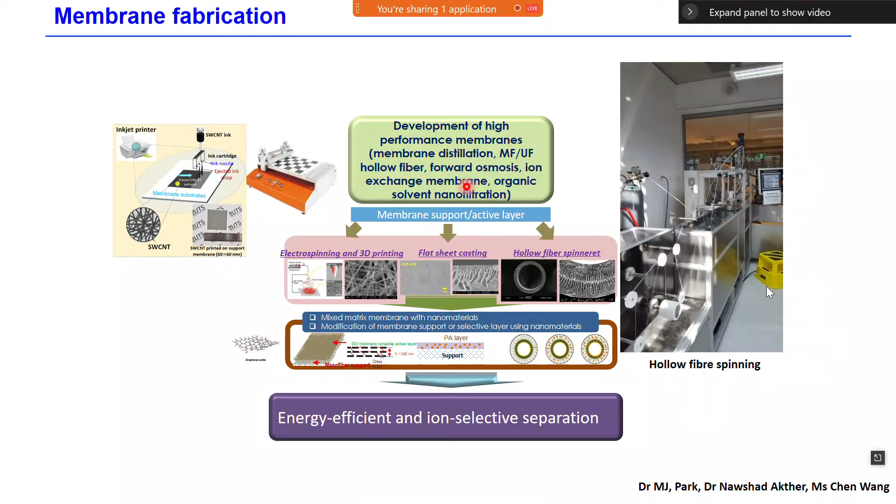So this is one of our activities. Professor Drolli also mentioned membrane importance. We have contributed our research on membrane fabrication in terms of membrane distillation, also hollow fiber, microfiltration, ultrafiltration, forward osmosis, ion exchange membranes, especially for CDI, and then organic solvent nanofiltration. So MJ Park and Nawshad and Ms. Chen Wang are working on this membrane fabrication area.

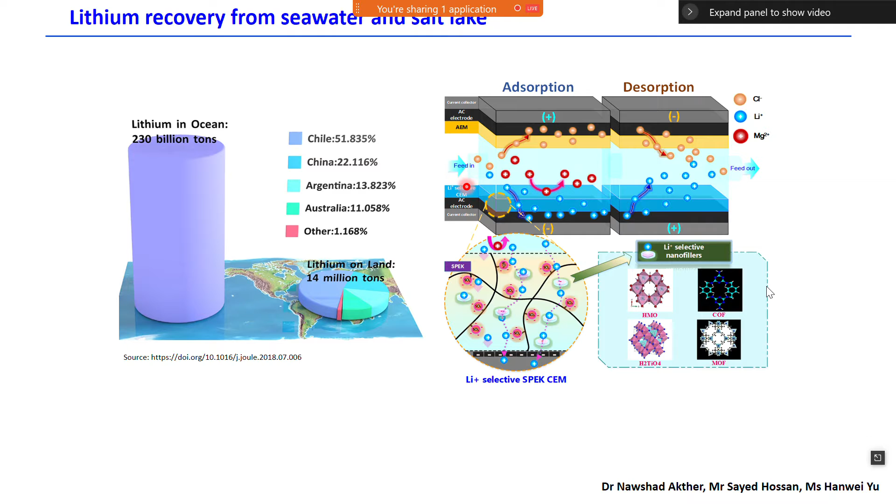Also lithium recovery from seawater and salt lakes. Professor Drolli also mentioned resource recovery for lithium in seawater. Our group is especially interested in CDI and lithium selective ion membrane development. So we have applied CDI and ion exchange membranes for the recovery of lithium. We are contributing together with Dr. Nawshad Akther and Sayed Hossan and Ms. Hanwei Yu. And this is our applied research.

So, based on our previous CDI experience, we have funding from the United Nations. There is one very small country whose capital is Funafuti. Tuvalu is very much impacted by sea level rise, so they have salt contaminated groundwater. So we have collaborated with them to look at renewable energy, solar driven CDI desalination technology, to have more applications. We are now working to apply our developed solar powered CDI technology in Tuvalu for desalination.

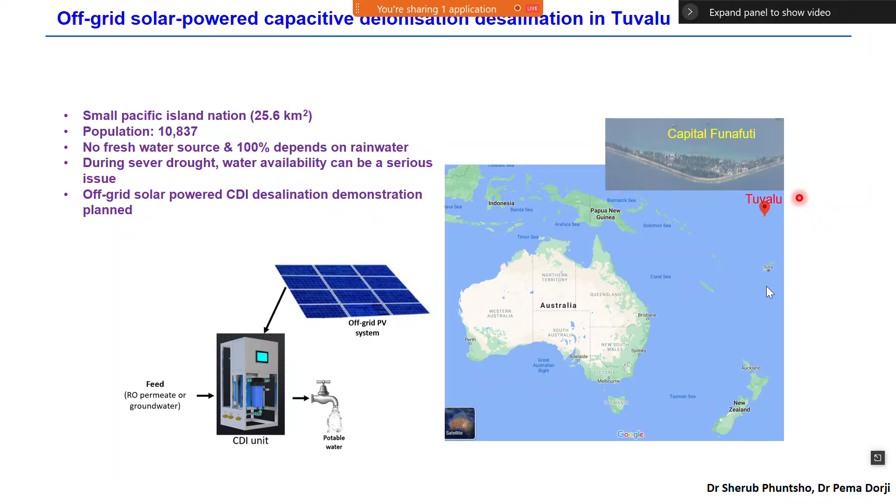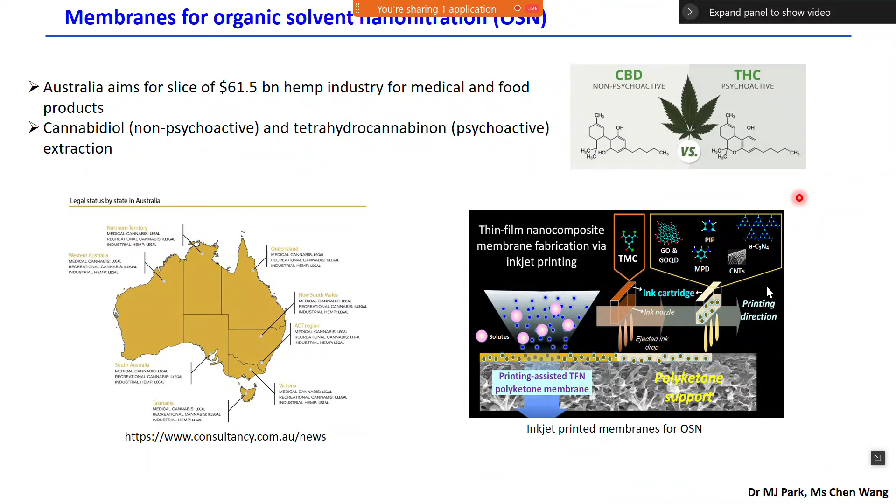Dr. Sherub Phuntsho and Pema are working on this area, and MJ Park and Ms. Chen Wang are working on organic solvent nanofiltration. In Australia, cannabis is legal. Cannabis includes CBD and THC, which have medical applications. So there is a lot of organic solvent utilization. We want to contribute to how to recover this organic solvent using organic solvent nanofiltration to separate specific compounds in the cannabis, so that we can save a lot of energy and address safety concerns, rather than a distillation process. That's our overall research activity.

And today, my main topic is about the circular economy and resource recovery.

So let me tell you what's the definition of circular economy and resource recovery. A circular economy is an economic system that tackles global challenges like climate change, biodiversity loss, and waste and pollution. Resource recovery is using waste as input material to create valuable products as new output.

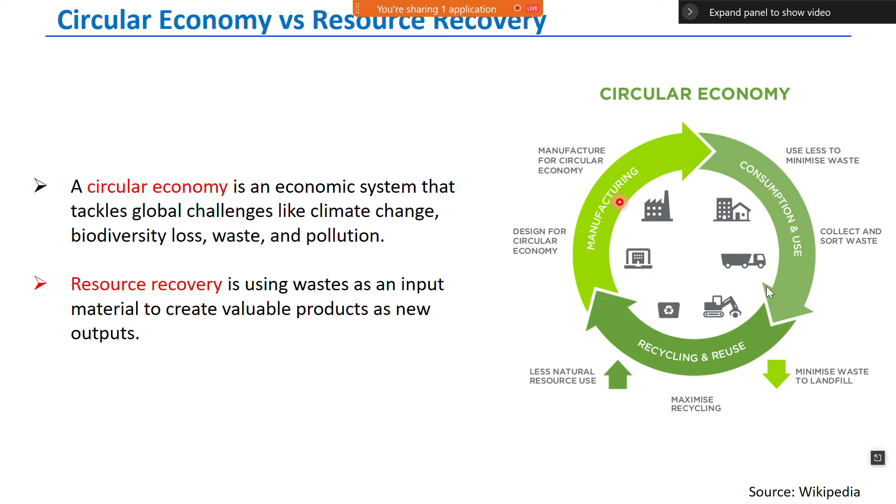So if you look at this diagram, you will have a better understanding. Resource recovery is more about how we can make less natural resource using our recovered resource, and then we design for the circular economy and manufacture for circular economy. So this is more about the manufacturing side. The resource recovery is a subset of a circular economy. The circular economy is the bigger concept of resource recovery.

So today we want to recover urine to fertilizer. That's my talk. So as soon as you get up in the morning, what are you doing first? Somebody drinks water. Most people, they have to go to the toilet. So when you urinate, what's your urine inside?

You can see a lot of nutrients. Water is very high content, and nitrogen, phosphorus, potassium, calcium, magnesium, sulfate, iron, manganese, boron, molybdenum, zinc, copper, and then some organics, also some micropollutants such as pharmaceuticals or hormones, as well as sodium chloride, some pathogens because of outside contamination.

So we produce the urine every day, almost 1.5 liters from each person. So there's a lot of concentration of nutrients. If we recover it, we can produce a lot of fertilizer as a good material without any risk problem.

So this is what we live for today. We are very much a linear economy. We produce the nitrogen from the Haber-Bosch process, nitrogen fixation. So we produce the urea or ammonia and supply it to food.

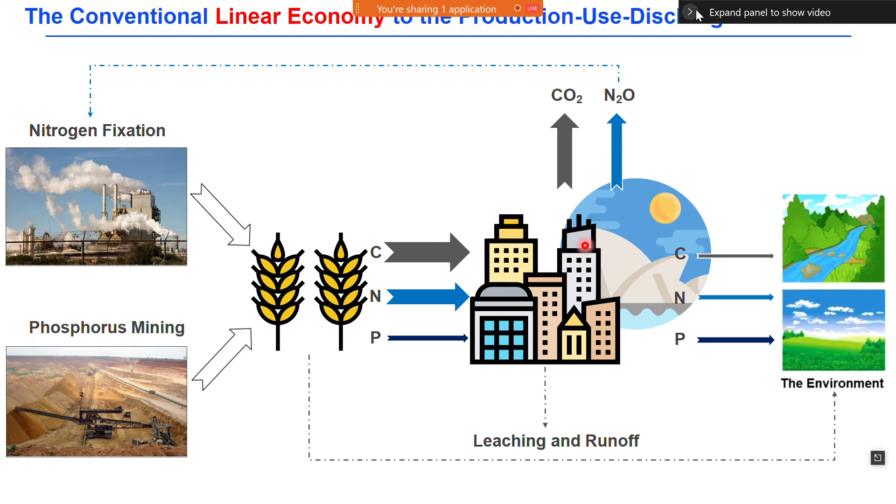So my study is about how we make this linear economy into a circular economy system. That's what our research is about. If you look at the international fertilizer market, it's around $150 billion US, and it has to keep increasing because of increasing population and industry. Also there's a global shortage of nitrogen and phosphorus fertilizer, so the price will be higher. So if we potentially convert our urine to fertilizer, we can cover a large portion of the total liquid fertilizer market that can be recovered.

So let's say now in 2021 we have 8 billion population, and everybody produces 1.5 liters per day, so we produce 12 billion liters of urine. That urine contains around 20 grams per liter of salt, which is mostly fertilizer, and we can convert it to fertilizer. So we produce every day 240,000 tons of fertilizer, especially nitrogen, because this has the highest concentration - 4,800 tons of nitrogen per day we can produce.

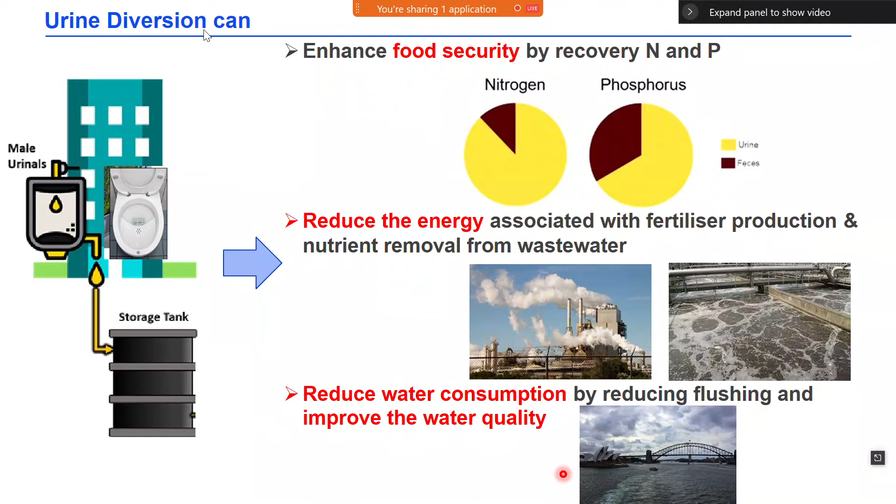Also, we can reduce water consumption by reducing flushing and improve water quality. That's the main key point, so that we can move from a linear to a circular economy system: producing food, then collecting nitrogen and phosphorus to produce fertilizer and grow food. That's how we can make sure our economic growth aligns with environmental protection.

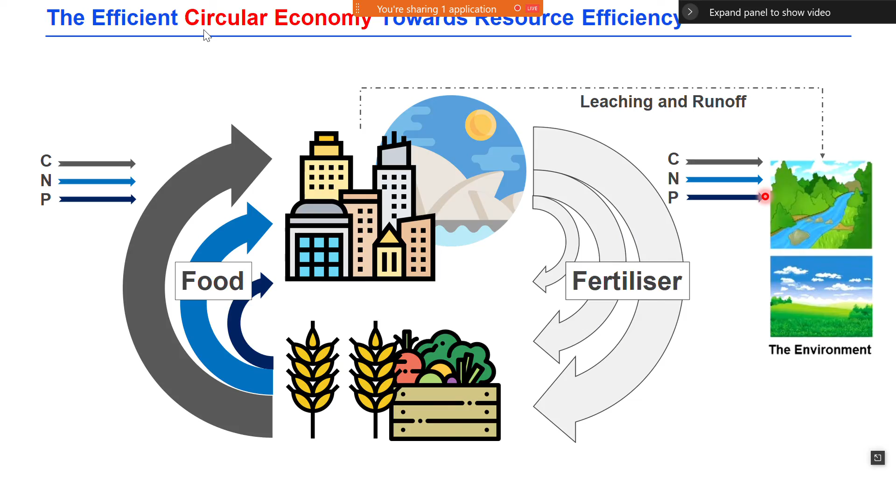So let's look at internationally who are working on urine diversion systems. There are several countries already that have developed a lot of new technology and effective ways of processing it.

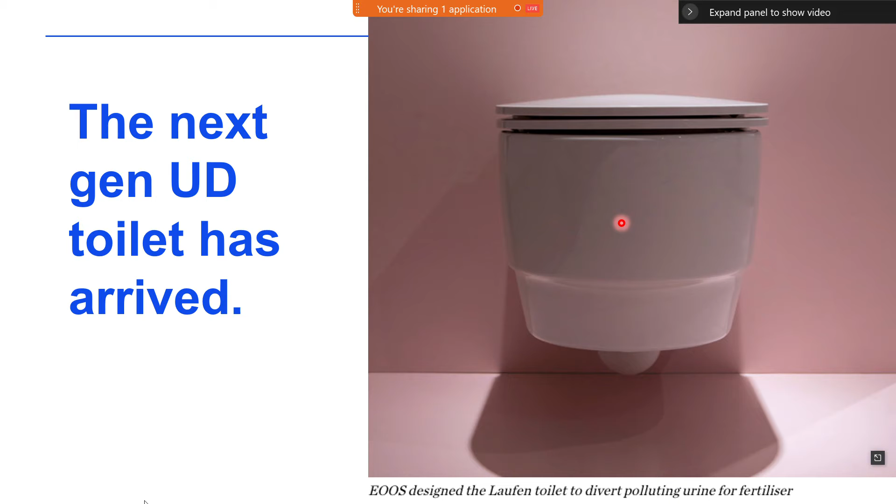A Swiss group has a building with a urine diversion system. Sweden and some U.S. locations, such as Seattle and the Michigan, Rich Earth Institute, are also working on urine diversion systems. This is the very latest urine diversion toilet.

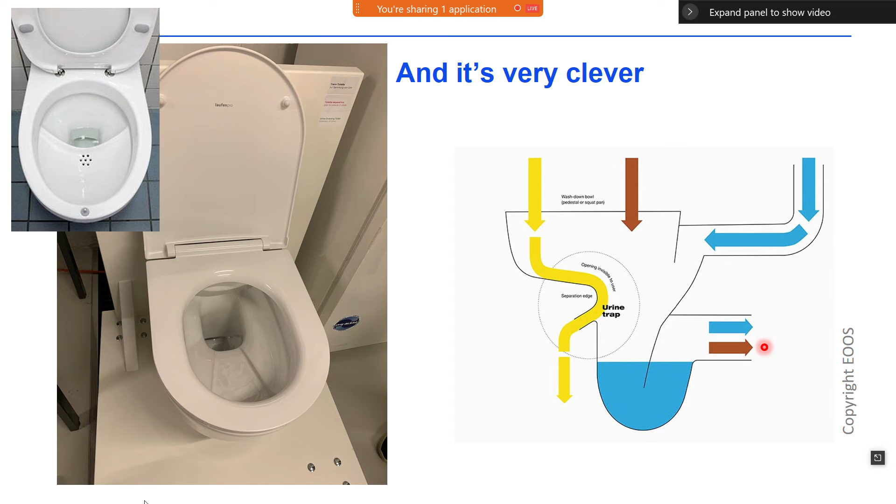This is the latest version of the smarter toilet. You can see the urine comes to the front part, and because of surface tension, the urine goes into the urine diversion plumbing system, while feces goes to the back. So we can easily separate urine and feces and divert them.

If you look at urine aging: when you urinate for the first time, most people see a yellowish color, because some organics create that color in your urine—mostly a very high concentration of urea. Urea is almost 2% of your fresh urine.

As time goes by, the urine changes to a brownish color, because the yellow color comes mostly from organics such as phenol. Phenol contacts light and converts, changing its molecular structure to some linear structure, producing a brownish color. You can think of it like an apple.

When you take one bite of an apple, initially it's a little white, and then an hour later, because of saliva, enzymes, and oxidation from air, the phenol compounds change to linear compounds, so the apple surface turns brownish.

This is a very similar organic effect, as well as an aeration effect—there's a color change. Then urea undergoes hydrolysis: you produce ammonia from urea, and the ammonia creates a very high pH.

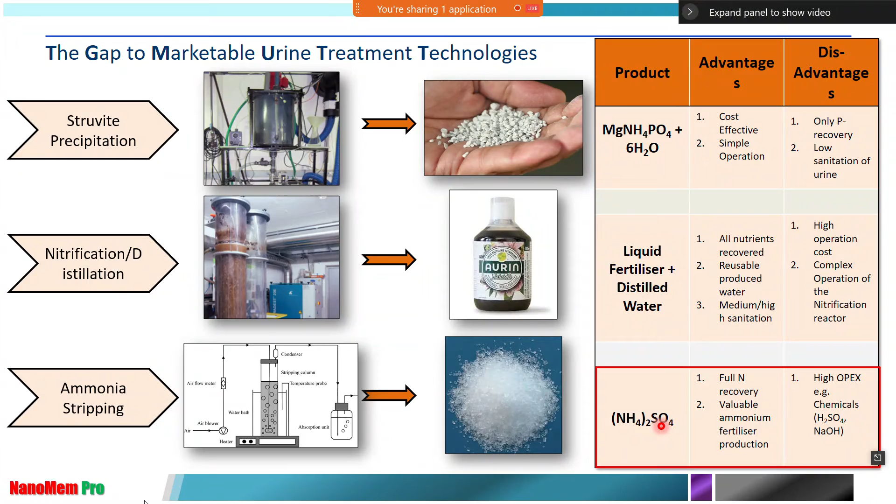Still, the technology, process, and public perception present a lot of obstacles to bringing this kind of technology to market, so we try to contribute to making real fertilizer commercialization applications. We have investigated this for the last 5 years. Our PhD student Federico Volpin has investigated urine fertilizer production to achieve water recovery, nutrient recovery, and energy recovery.

We look at how we can apply space applications for urine diversion systems, and with hydrolyzed urine, how we can produce good diluted fertilizer, and how we can produce power using an RED system, because hydrolyzed urine has almost 20 to 30 grams per liter of total dissolved solids, a very high concentration of salt. Also, algae can be grown using this technology, so a biomass dewatering system can be applied. We have published depending on our topics of interest.

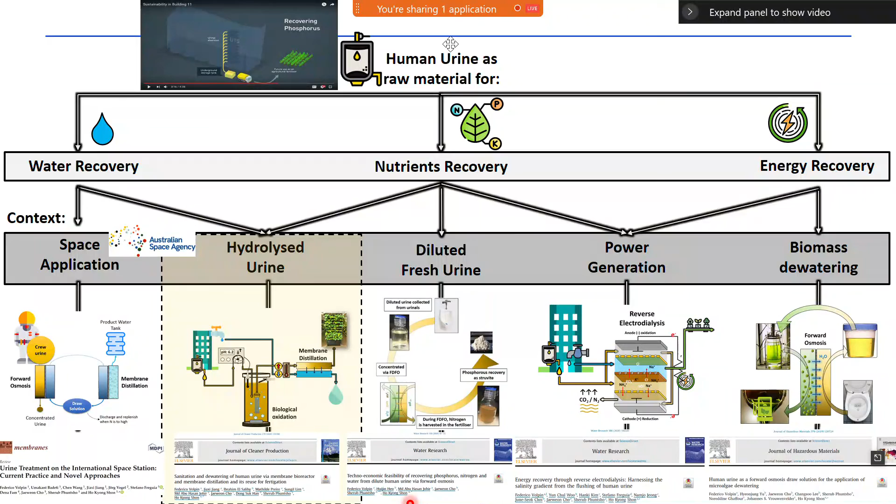I don't want to cover all our research, just want to share the most important findings.

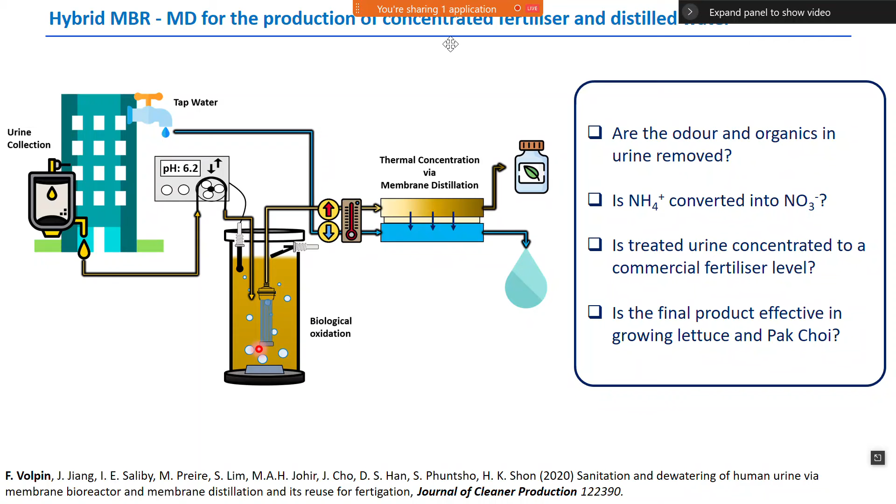So this is our membrane bioreactor and MD. We have tried to convert our urea to fertilizer through nitrification, and then concentrate it to produce our fertilizer.

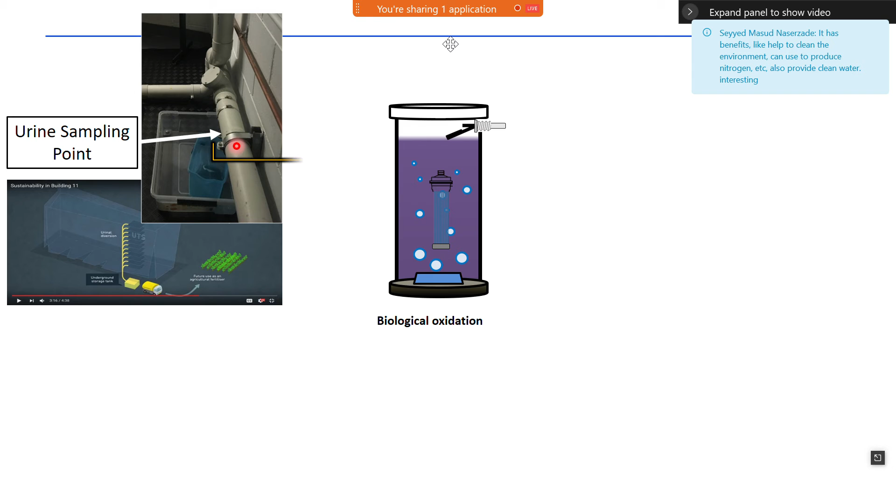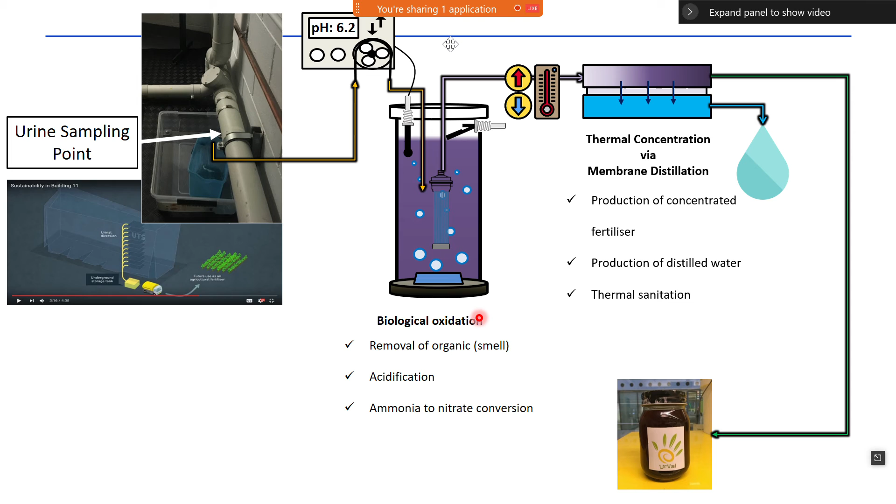This is our university, a 15-story building, and we have a urine diverting toilet. We collect our urine at the basement of the building, then go through nitrification to remove the smell and convert the ammonia to nitrate, then concentrate it to produce our concentrated fertilizer to grow some food - lettuce, pak choy, as well as some parsley we have tested.

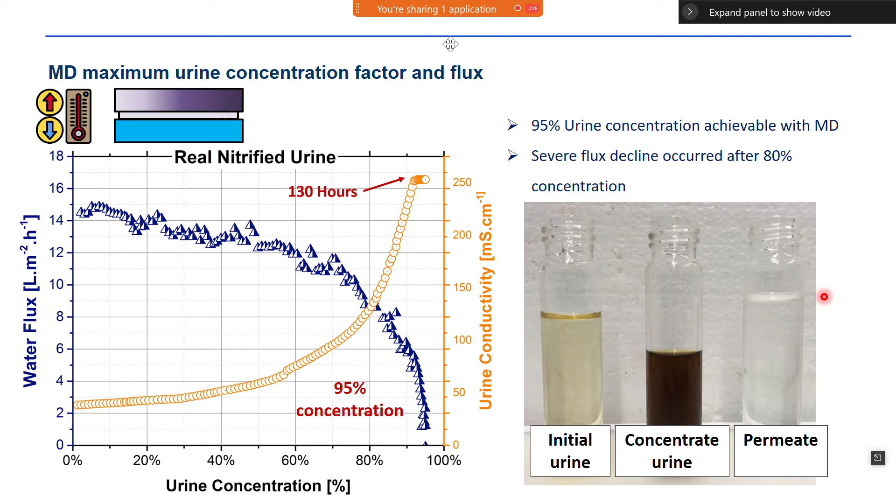This is our performance data for the membrane distillation. You can see the initial urine, concentrated urine, and the permeate of our concentrated urine, as well as the raw urine concentration. You can see the ammonia, phosphate, and potassium, which are the major nutrients.

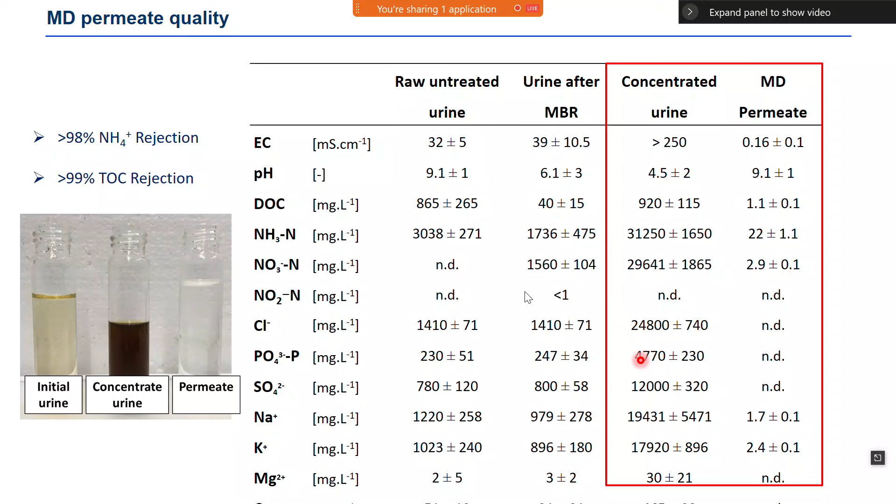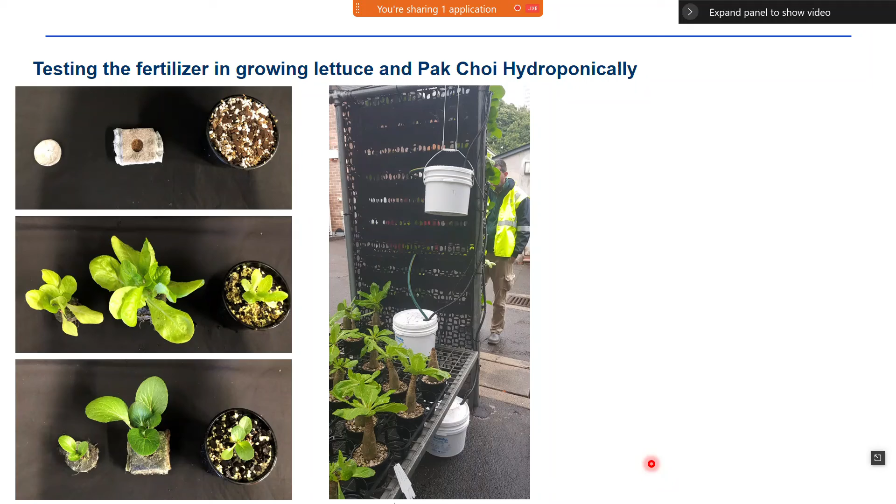We have tested this in a hydroponic system, comparing our fertilizer with commercial fertilizer, and found very similar performance.

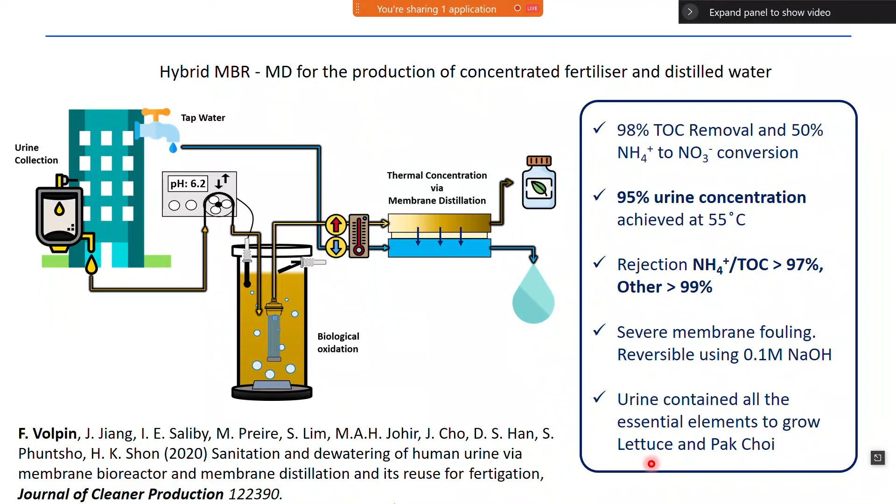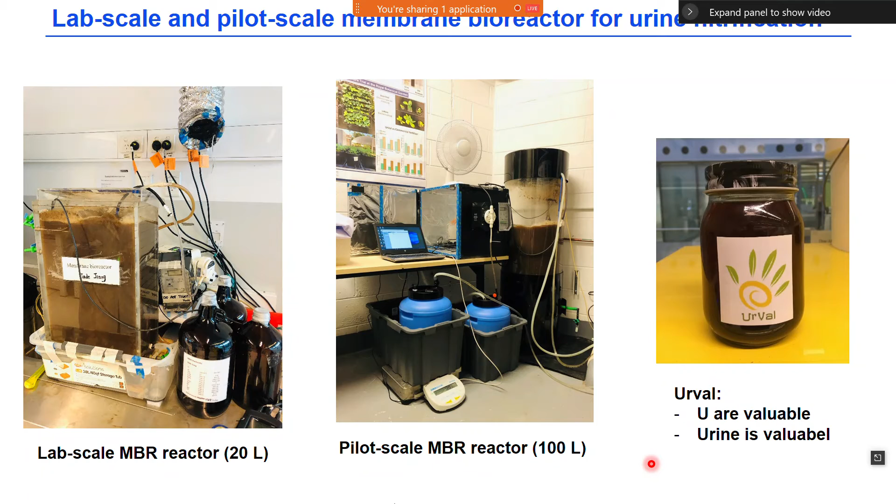We have developed this membrane bioreactor and membrane distillation system to concentrate our fertilizer, operating at lab scale and pilot scale for the last year to produce it. This is also a very simple hydroponic system to grow coriander and basil. We found that our fertilizer and commercial fertilizer had very similar performance.

We have also been working with another group in our project who developed electrodialysis to concentrate our fertilizer. The hydrolyzed urine contains ammonium and potassium, and passes through a cation exchange membrane, letting ammonia, potassium, and sodium through, while compounds like phosphate and carbonate pass through an anion exchange membrane to further concentrate the fertilizer. We tested this fertilizer and found very high concentrations.

This is our micropollutant trial. We found that some micropollutants can be detected in our urine, so we tried using activated carbon, and found that most micropollutants can be removed using activated carbon. We combined this into our system.

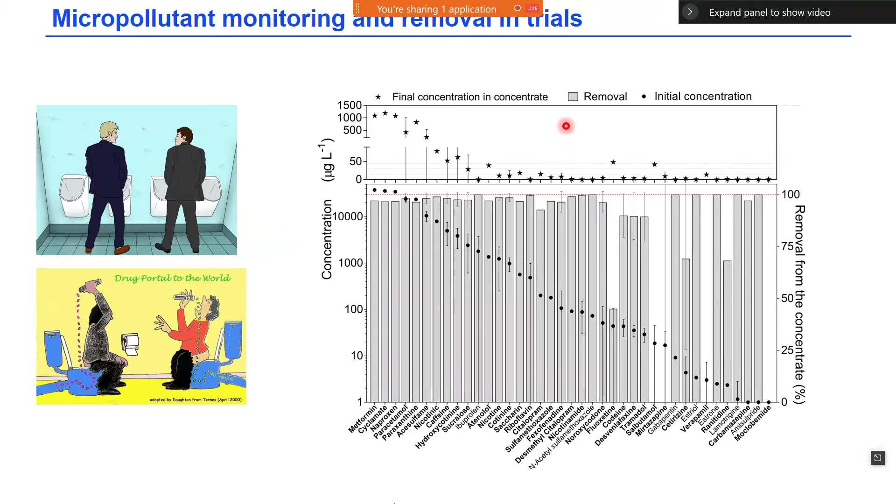Based on that, we developed our research hub to look more closely at urine collection, processing, optimization, and user aspects - that's our project's overall aim. We have 20 organizations working on different research themes to develop their own expertise in the technology.

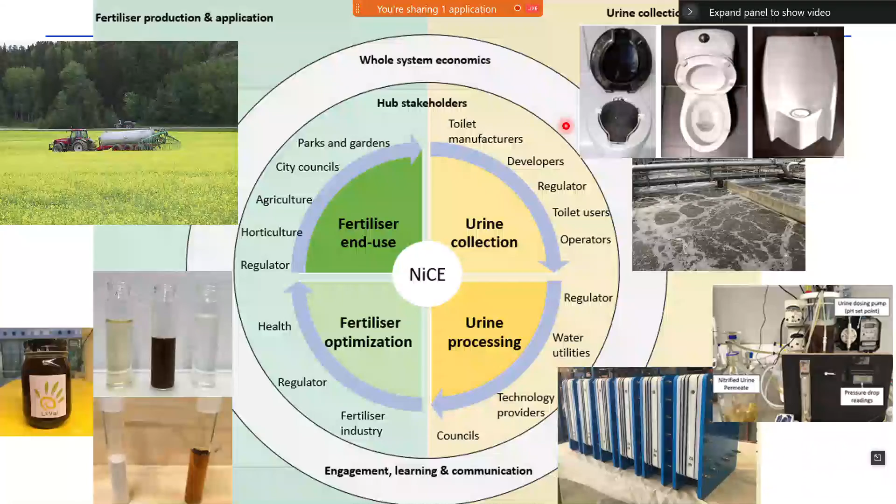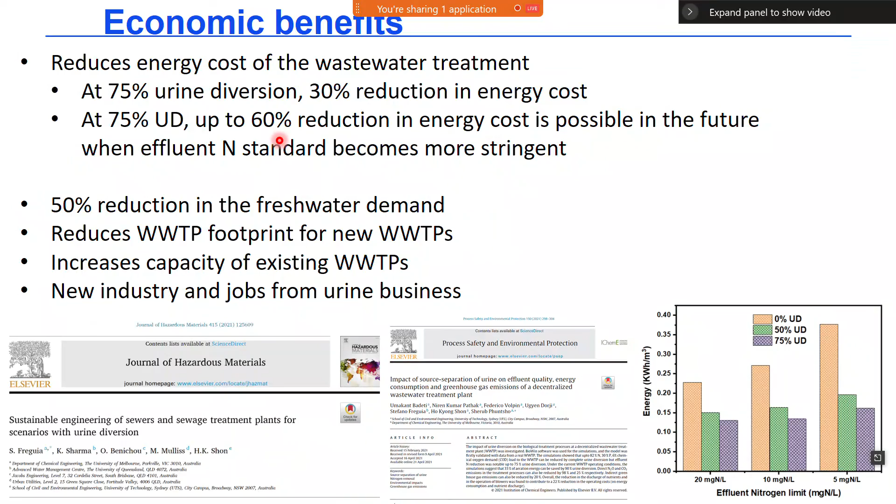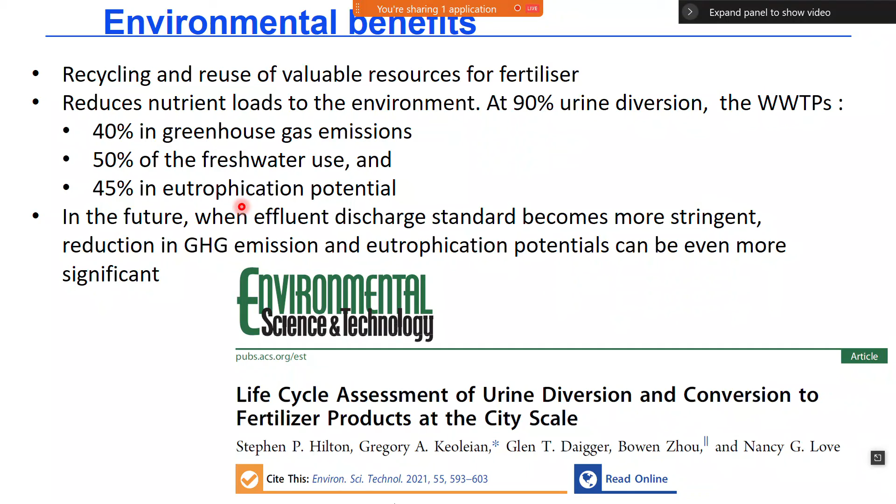So that's the economic benefit. If we have this urine diversion, you can reduce 30% of the energy cost in a wastewater treatment plant, 60% reduction in energy cost when you have more stringent nitrogen concentration. Also, you can reduce 40% of the greenhouse gas emission and 50% of fresh water use. You can reduce 45% in eutrophication potential because you recover the high concentration of nitrogen and phosphorus.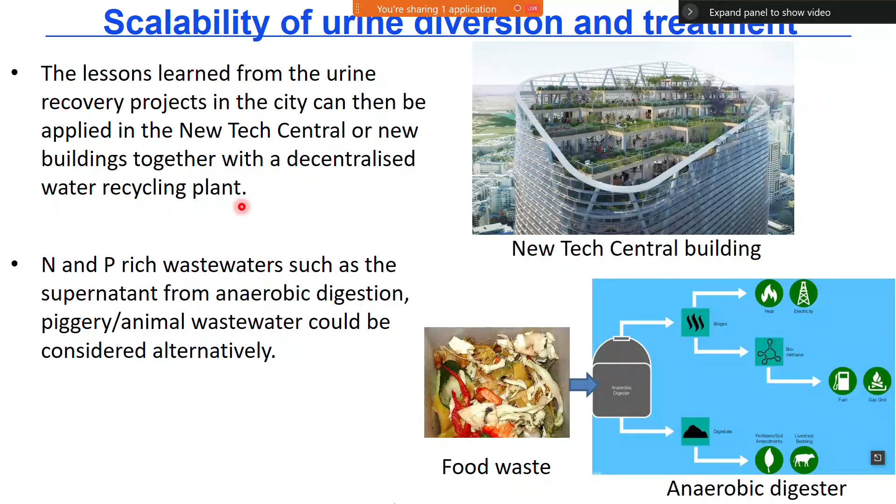So that's what we are trying to look at, the different application of this urine recovery system at the building level, as well as anaerobic digester and animal wastewater which contain very high concentration of urine. Also public toilet together with the green wall, and some vertical farming systems can be combined with this technology. And also we look at the transdisciplinary research angle, and I don't want to make a very detailed presentation.

And we need to look at social, technical, environmental, economic, and political issues to make this concept happen in our market. Also public education, public feedback, and public advocacy will be our next step to further develop this technology.